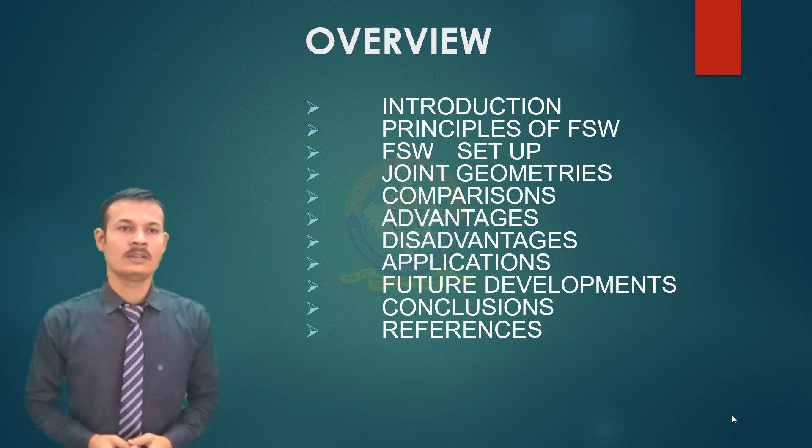This is the overview of what I am going to present, with introduction and concluding on references.

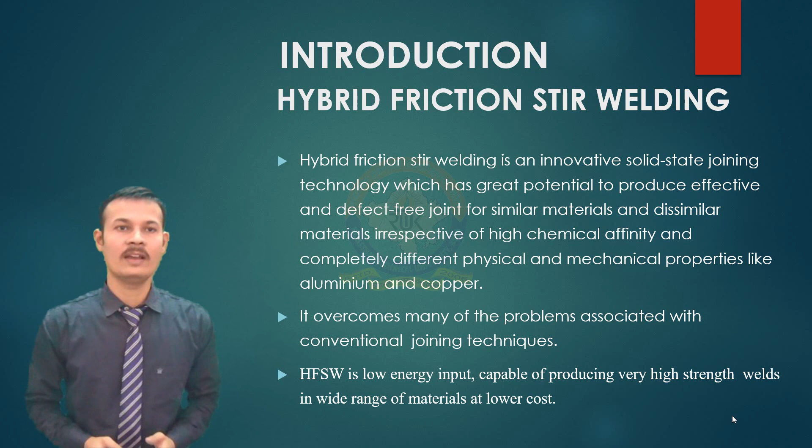The first question that comes to mind is, what is hybrid friction stir welding? It is an innovative solid state joining technology which has great potential to produce effective and defect-free joints for similar materials and dissimilar materials, irrespective of high chemical affinity and completely different physical and mechanical properties, like aluminium and copper. It overcomes many of the problems associated with conventional joining techniques. HFSW has low energy input, capable of producing very high strength welds in a wide range of materials at lower cost.

Welding is mainly of two types: one is fusion welding and the other is plastic welding. Fusion welding is a process that uses heat to join or fuse two or more materials by heating them to melting point. The process may require the use of filler material. No pressure is required in this process. The examples are gas welding and arc welding.

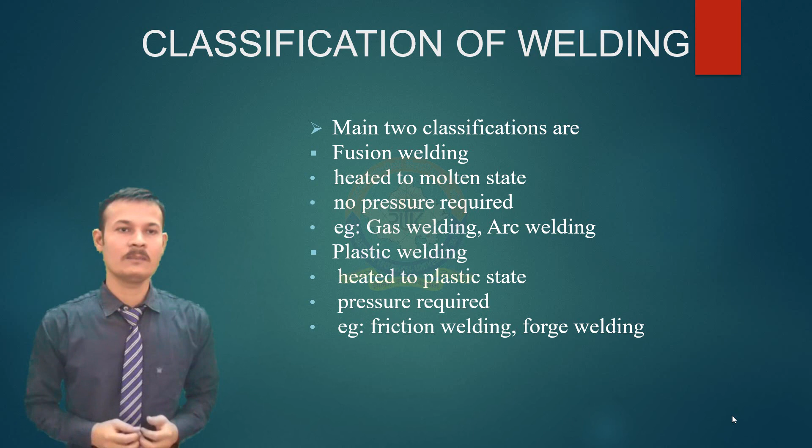Plastic welding is a process of creating a molecular bond between two compatible thermoplastics heated to a plastic state. Pressure is required in this process. The examples are friction welding and forge welding.

Now coming to the working principle of friction stir welding. The FSW process involves four phases, which are: first, plunging phase; second, dwelling phase; welding phase; and finally exit or retract phase. Now discussing all these in brief.

In FSW, a cylindrical shoulder tool with a profiled probe is rotated and slowly plunged into the joint between two pieces butted together. Then frictional heat is generated between the wear resistant welding tool and the material of the workpiece. After that, this heat, without reaching the melting point, allows traversing of the tool along the weld lines. Finally, the plasticized material is transferred from the front edge of the tool to the back edge of the tool probe, and it's forged by the intimate contact of the tool shoulder and pin profile.

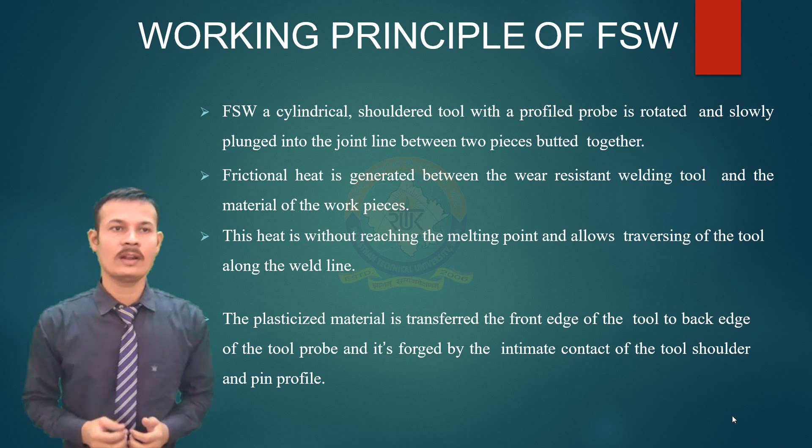This is a schematic diagram of friction stir welding. Here you can see that there is sufficient downward force required to maintain registered contact between the tool and the workpiece. You can relate the working of friction stir welding by this diagram easily.

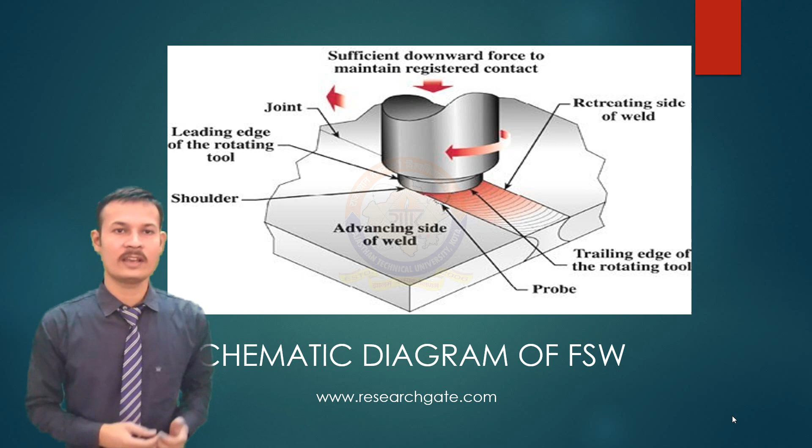After discussion of the working, we are going to discuss important welding zones. Friction stir weld in its cross section consists of three main zones: first, the nugget or stir zone; B, thermomechanically affected zone (TMAZ); and C, heat affected zone (HAZ). The above three zones pose distinct mechanical properties, with the nugget and TMAZ being the weakest part of the joint.

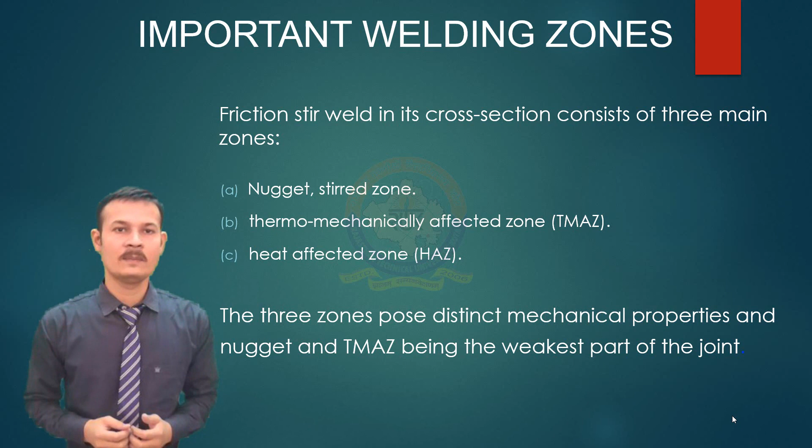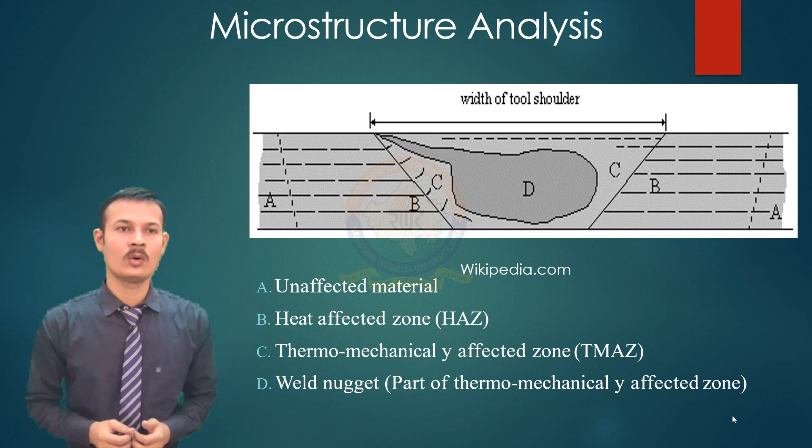Now we will do the microstructure analysis with the help of the diagram. Here is the diagram, you can see that parts A, B, C, D are marked. From this figure, you can easily understand the whole process and its effect on the different parts of the workpiece.

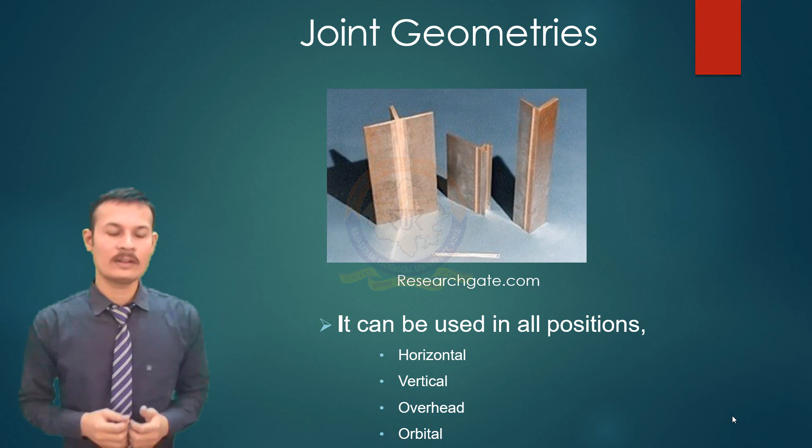Now, when suitable material comes under consideration, here we will know the some of materials which can be welded with the help of hybrid friction stir welding, like copper and its alloy, lead, titanium and its alloy, magnesium alloy, zinc, plastics, mild steel, stainless steel, nickel alloys.

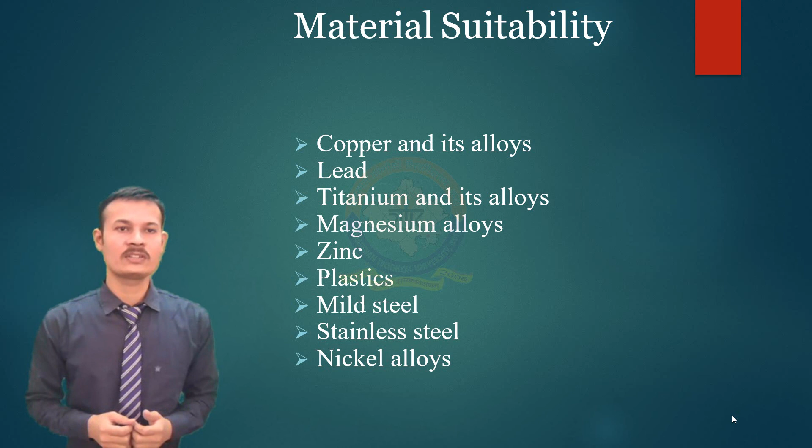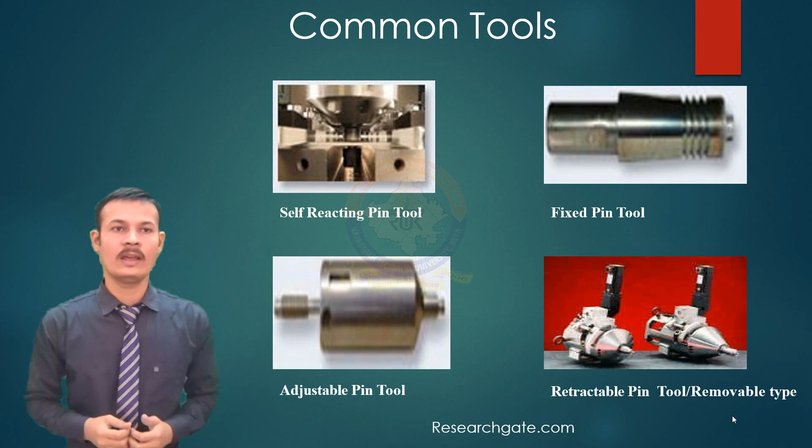Here are some tools which are commonly used in the welding process. According to different situations, you can see some of these given in the slide, for example, self-reacting pin tool, fixed pin tool, adjustable pin tool, and retractable pin tool. Here are some friction stir welding machines you can see.

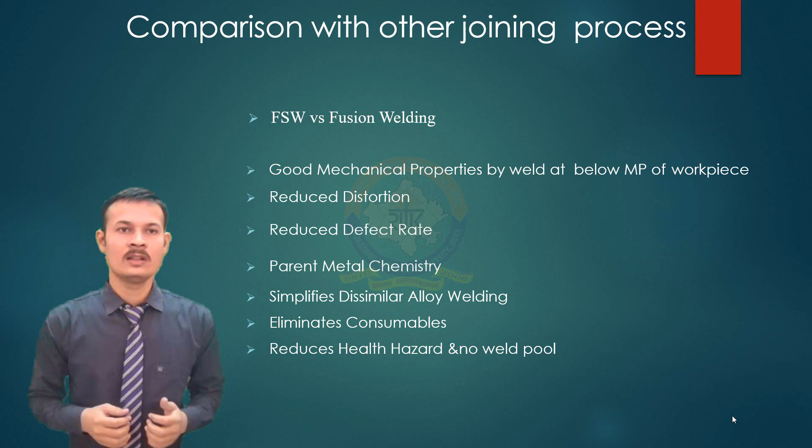Making a comparison of FSW to other joining processes, we are considering FSW versus fusion welding. Good mechanical properties by weld below melting point of workpiece, reduced distortion, reduced defect rate, parent metal chemistry, simplifies dissimilar alloy welding, eliminates consumables, reduced health hazards, and no weld pool. Recently, we have done a comparison of FSW to fusion welding.

Here we will learn about the advantages of frictional stir welding so that we can understand why we are using stir welding over other welding processes. The advantages of frictional stir welding are as follows: good mechanical properties as in weld condition, improved safety due to absence of toxic fumes, no consumables, easily automated on simple milling machines, can operate in positions vertical, horizontal, overhead, and etc.

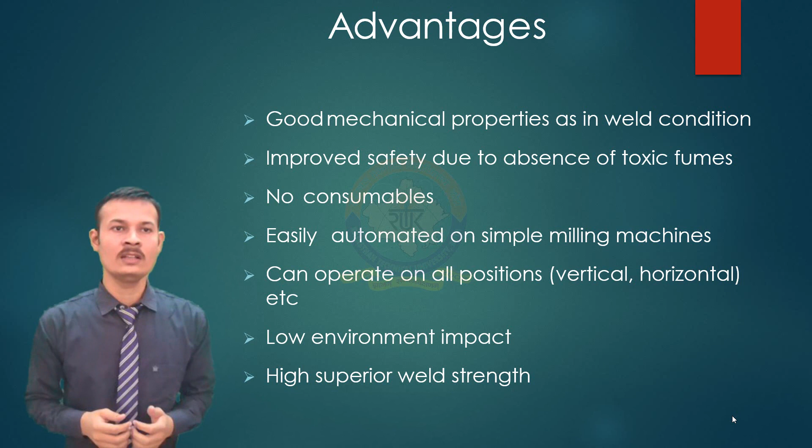Low environment impact, high superior weld strength. These are some advantages we have just discussed. These are the points which make frictional stir welding the future of joining processes.

As we all know, everything has some pros and cons. Now we will discuss advantages and disadvantages. Here we will discuss disadvantages.

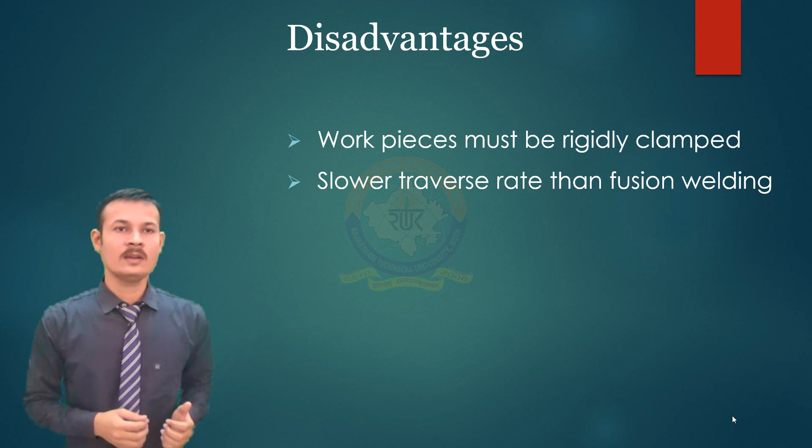And it is the most important part of the PPT. Why am I saying that? As we all know, we want to understand the topic by relating to it ourselves. Here we will discuss the applications of frictional stir welding, and whenever you visit places, you can relate to that.

Frictional stir welding is used in various industries and sectors: shipbuilding, offshores. FSW is mostly used in aircraft industries for welding wings, fuel tanks, aircraft structure, etc. Used in marine industries for structure work, used in automotive industries to weld wheels, rims, chassis, fuel tanks, etc. It is used in chemical industries for joining pipelines, heat exchangers, air conditioners, etc.

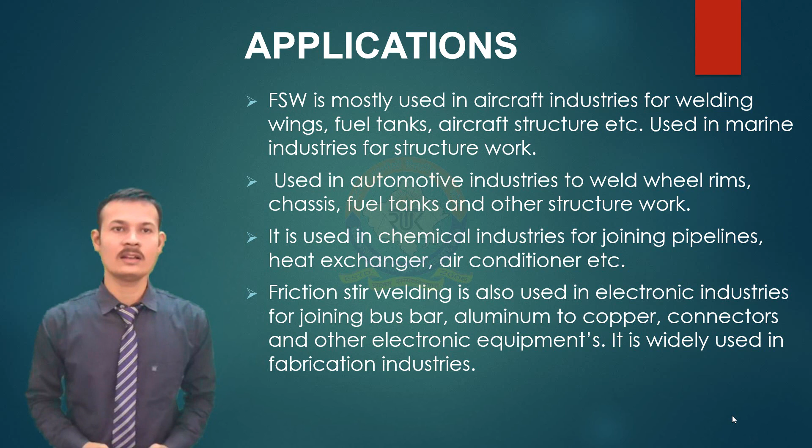Frictional stir welding is also used in electronic industries for joining bus bars, aluminium to copper, connectors and other electronic equipment. It is widely used in fabrication industries. As we have discussed its applications previously, we find that it is used in aerospace, automotive, railways, fabrication, robotics, personal computers, and joining of aluminium 3D printing materials.

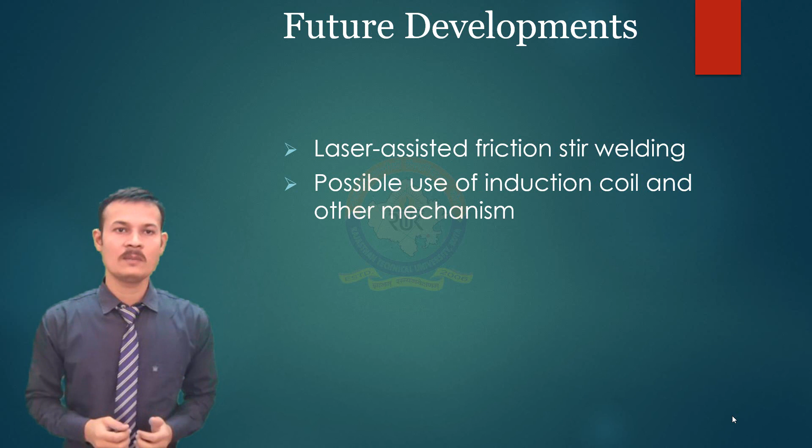We can easily understand its value, so it's time to discuss its future developments. What will be the future possible changes in this field? First, it will become laser assisted friction stir welding—laser might be used in that. Second, possible use of induction coil and other mechanisms in this. These two changes can make a huge difference and make this advantageous over other welding processes.

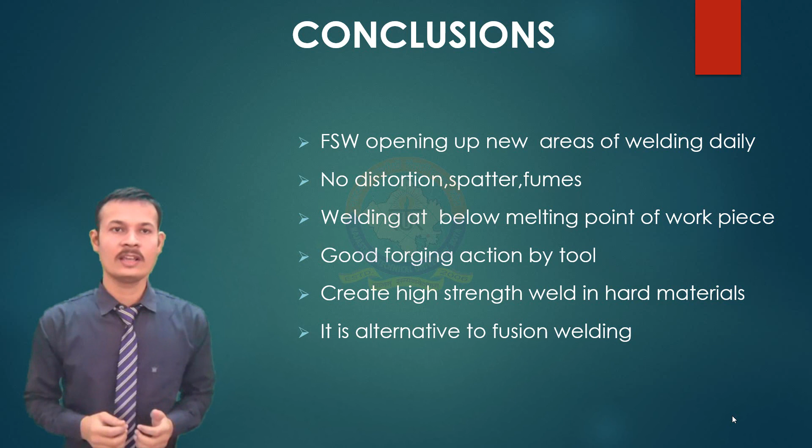Concluding all this, we reach the conclusion: firstly, we can say FSW is opening up new areas of welding daily. Second, no distortion, no toxic fumes. Third, welding at below melting point of workpiece. Fourth, good forging action by tool. Fifth, create high strength weld in hard materials. Sixth, it is an alternative to fusion welding.